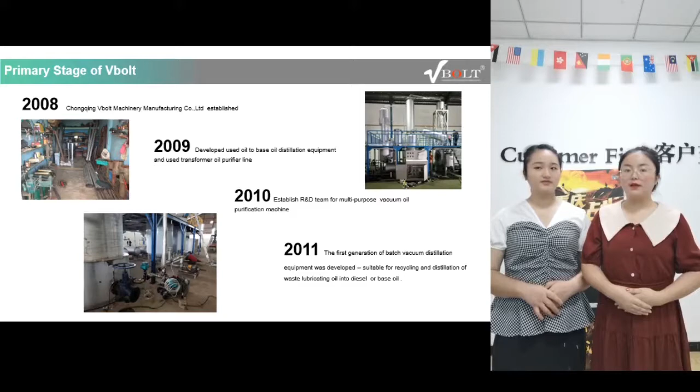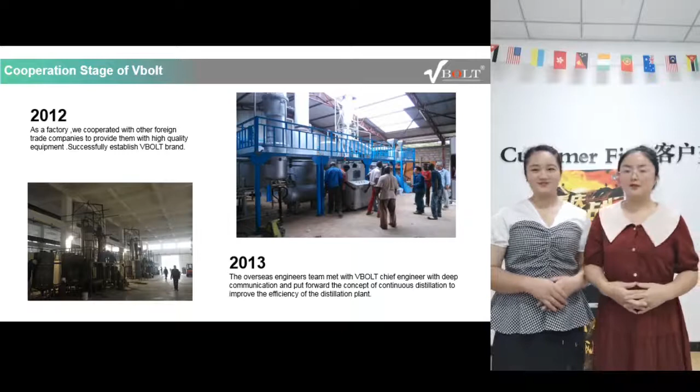After installing the machine, we tested the machine and we have turned the batch machine to continuous. It makes our machine more efficient. Oh yes, and changing the batch machine to a continuous machine means more productivity. Yes. And also we have gotten many innovations in those years.

Lisa, do you know the advantage of the membrane distillation technology? Yes, compared with the traditional distillation technology, I think there are 4 advantages of the thin film evaporating technology. First of all, this technology can make the waste oil form a dynamic molecular oil film, and this oil film can be evaporated rapidly in a short time, and it also can remove the water and the light hydrocarbons out of the waste oil. So in general, this technology can bring us more profits because it has more productivity and efficiency.

So compared with the traditional technology, our membrane distillation technology is more efficient. Yes, and more efficiency is more profits. Great. And how about the sulfur content? This is a main factor for the oil quality. How do you reduce the sulfur content?

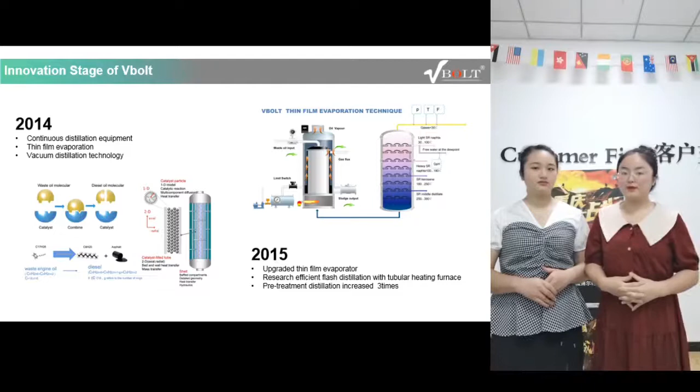Yes, we know that the sulfur content of the used engine oil is normally between 4,000 to 5,000 ppm, and after being treated by our machine, we can help our customers get diesel with 50 ppm sulfur content.

But we know that in the pyrolysis oil, the sulfur content is higher than in the used engine oil. How do we reduce the sulfur content? Yes, and we have also developed the extraction technology, and this extraction technology can reduce the sulfur content.

But for our company, just as I mentioned, the thin film evaporation technology can also reduce the sulfur content of the tire pyrolysis oil. So it's our company's trump card. We know that the sulfur content of the tire pyrolysis oil is about 10,000 ppm, and after being processed by our machine, we can get diesel of about 100 to 200 ppm. So for this reason, we don't need to use the extraction system.

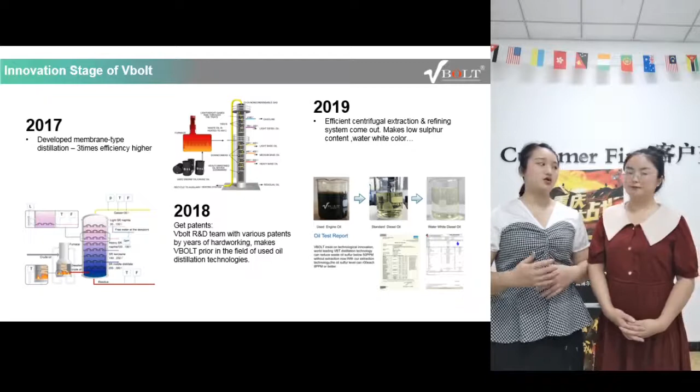Oh, so great. And let's see a short video about our factory.

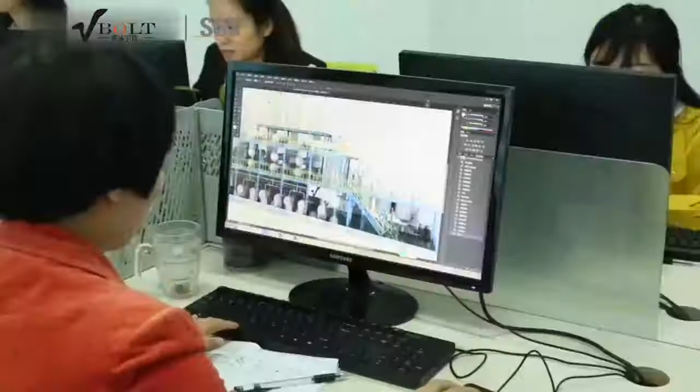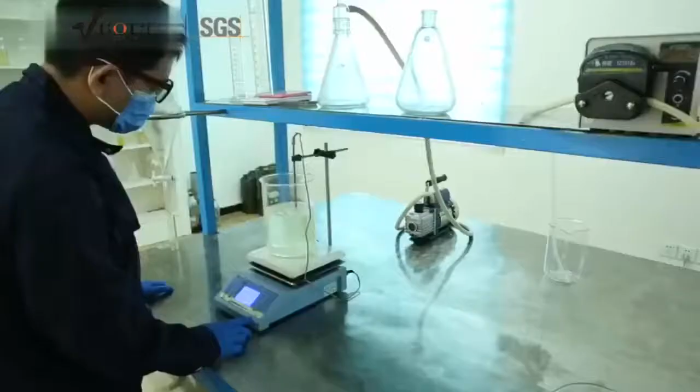Chongqing Vbolt Machinery Manufacturing Company Limited is a professional manufacturer engaged in the research, development, production, sale and service of waste oil recycle equipment, oil filtering equipment, extraction equipment, and distillation equipment. In recent years, Vbolt has obtained CE certificates, R&D multiple techniques, and successfully applied for patents. These include thin film evaporation systems, completely continuous high-efficiency membrane distillation systems, vacuum distillation systems, diesel oxidative desulfurization systems, chemical recycling systems, lubricant regeneration systems, etc.

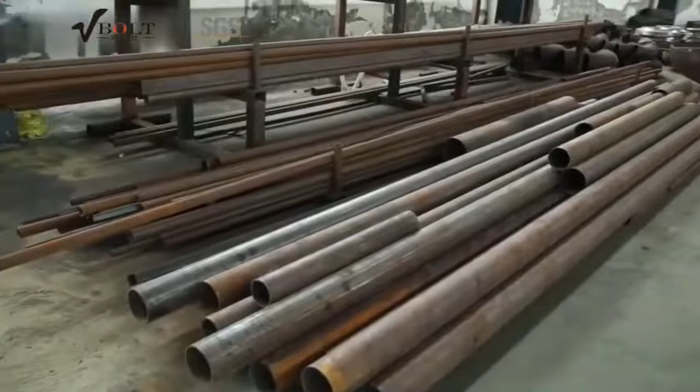Vbolt high-efficiency distillation equipment could not only recycle waste diesel engine oil, gasoline engine oil, various engine oils, industrial oils, hydraulic oil, transformer oil, etc., but also catalyze cracking of pyrolysis oils such as plastic pyrolysis, tire pyrolysis, and rubber pyrolysis, etc. At present, the completely continuous high-efficiency membrane distillation is the most advanced technology in 2019.

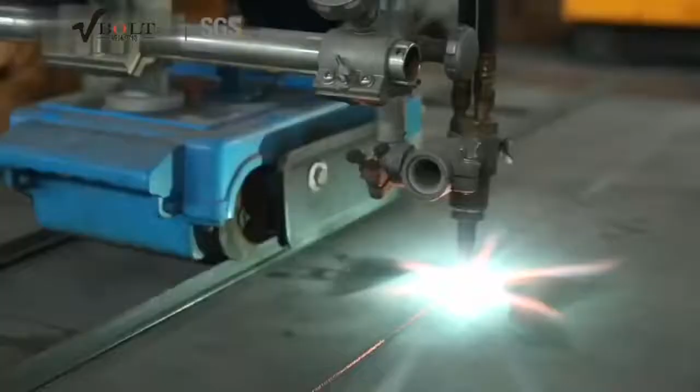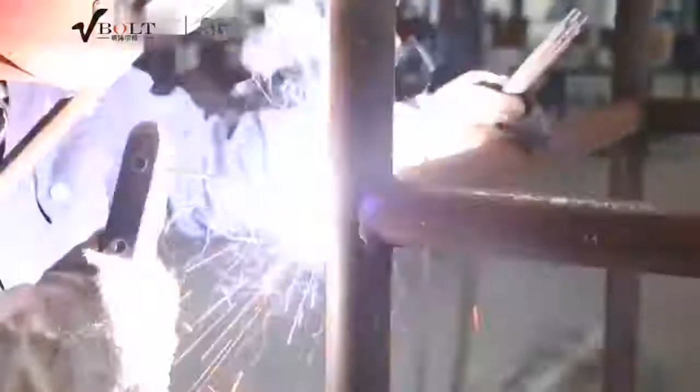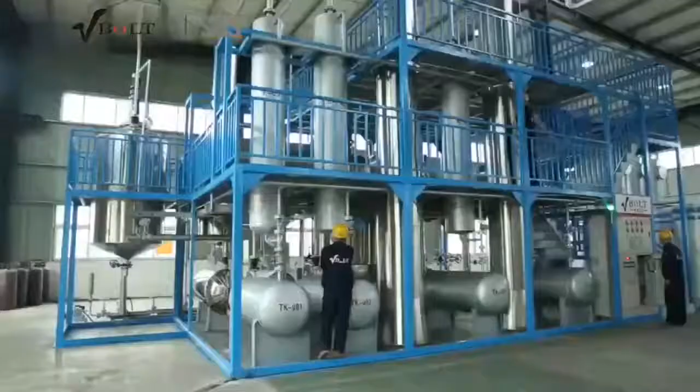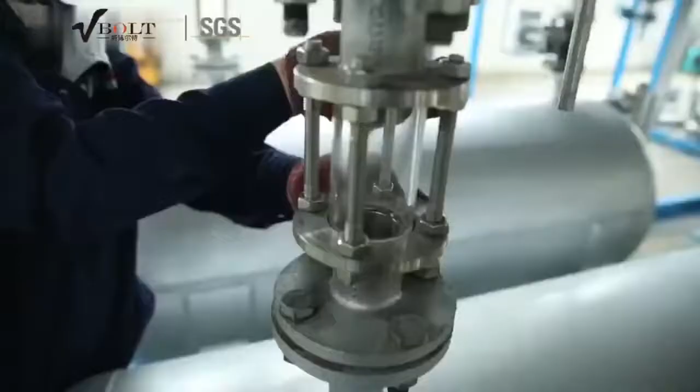Dedicated to strict quality control and thoughtful customer service, our experienced staff members are always available to discuss your requirements and ensure full customer satisfaction. Selling well in many cities and provinces around China, our products are also exported to clients in such countries and regions as Southeast Asia, Africa, and Middle East. We also welcome OEM and ODM orders. Whether selecting a current product from our catalog or seeking engineering assistance for your application, you can talk to our customer service center about your sourcing requirements. Welcome you from all over the world to our factory.

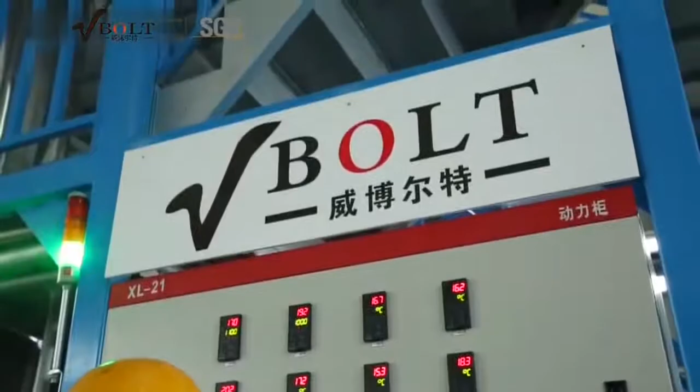Also, in those years, we have done research and development. In the field of oil treatment, we have gotten many certifications. What's the meaning of the Chinese Scientists Forum, Lisa? Oh yes, this award is issued by the Chinese Scientists Forum, and this award praises our company's progress and innovation in the oil distillation technology. So I think this is a great honor for our company, and also for the oil refinery industry.

Also, we have gotten many exclusive patents, like we talked about before, the membrane distillation technology. Yes, and the sulfur reduction technology, etc. Yes, we want to protect the environment, but we know if we process or use oil, it will generate some waste gas. How do you achieve this part?

Yes, we know that all of us are responsible for environmental protection, so this is also an important part for our company. So our company will do 2 steps to clear the waste gas. First of all, we will remove the acid in the left side tower, and then we will use the UV photo-oxygen catalytic equipment to remove some bad smell and bacteria of the waste gas. So you mean after treatment by our machine, is there emission? Yes, and it can meet the emission standard.

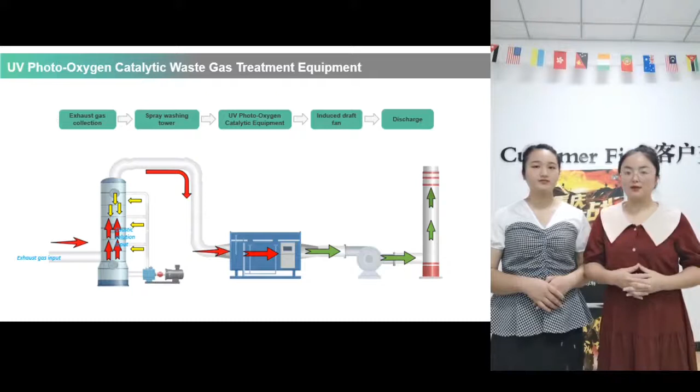Okay, great. And the next part, let me introduce the main products of our factory. The first one is our used oil to diesel distillation plant, the second is the used oil to base oil distillation plant, and the final is our oil purifier. And the first one is our used oil to diesel distillation plant.

Our diesel distillation plant can treat different kinds of used oil. Yes, like used engine oil, used motor oil, heavy fuel oil, and so on. Before treatment, the used oil color is very dark, and after being treated by our machine, we can get a yellow or water red color diesel.

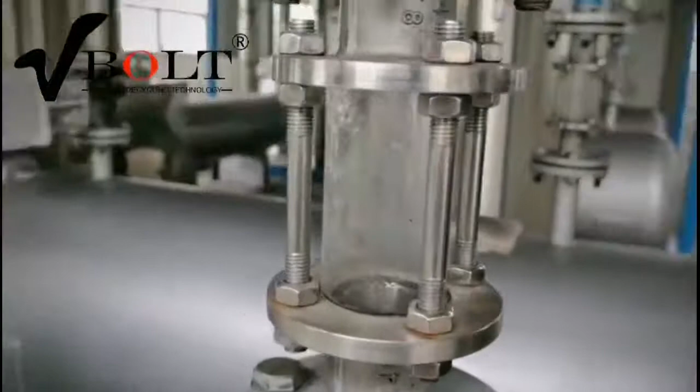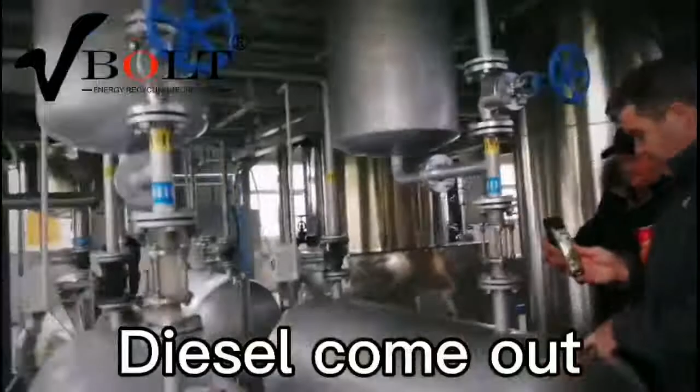And ours are base oil distillation plants. They can also treat different kinds of used oil. After being treated by our machine, we can get base oil. Yes, but some of our customers want to make the base oil into lubricant oil, so can we provide them the lubricant oil blending machine?

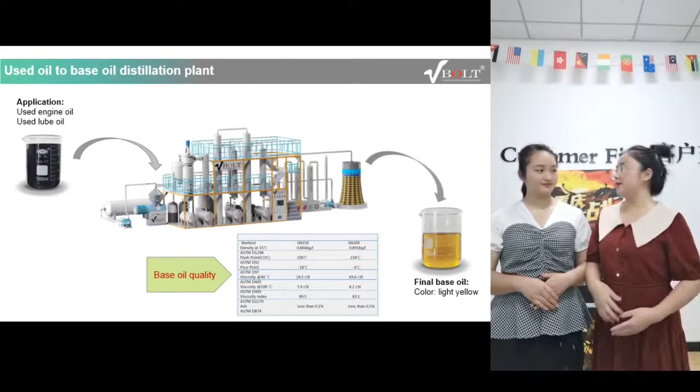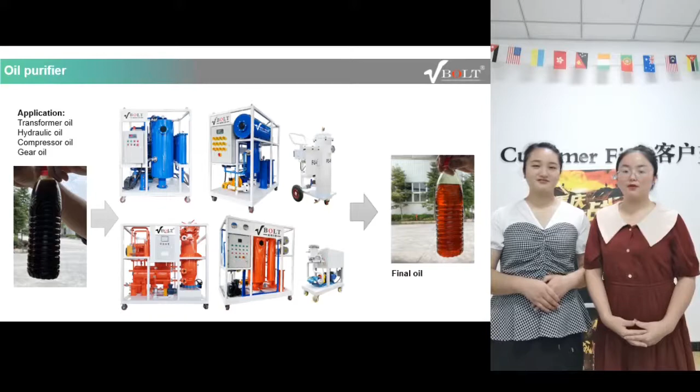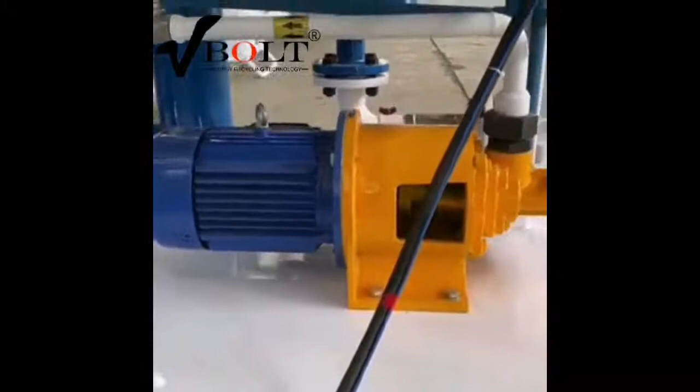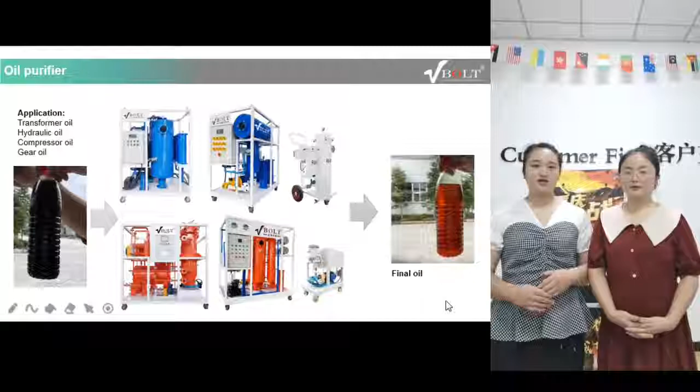Yes, our factory also provides a color removing system. It can change the red color to yellow or water-like color. Okay, this is a short video about our oil purifier. From the video, we can see that the final oil is very clear and pure.

Yes, Lisa, many customers want to do this project, but they don't know what they should do. Yes, so this is our company's duty, to help our customers invest small money but get more profits from this oil recycling. Money is very important for all of us. About the investment and the profit, can you analyze this part for our customers?

How many laborers do we need each shift? Yes, for the 1 ton per day machine, we just need 1 staff to run the machine. And how about the heating? Because in some countries electricity is very high cost. Yes, and if the price is high in your country, we can also provide various heating methods, such as coal heating, wood heating, or burner heating. So we can choose the heating way according to our customers' local market.

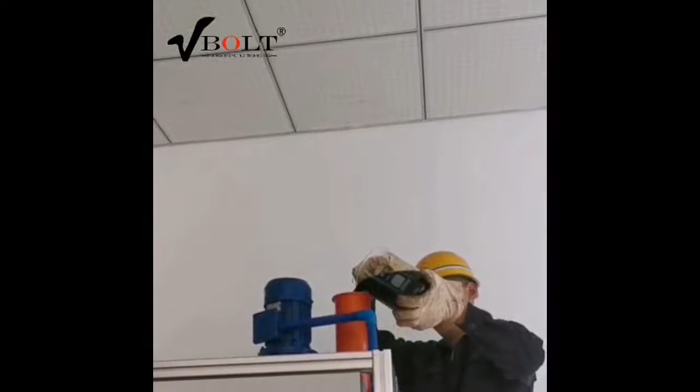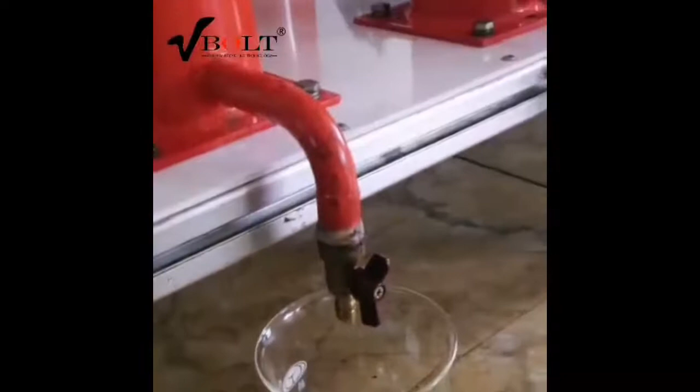So before you order, our customers can visit our factory with the used oil sample. We can do the experiment. Yes. Or you can send the used oil sample to us. We do the oil experiment. And then you can know our oil quality and the technology more.

Yes, and after you place the order, our engineer will also make the drawings for you, and we can give you more suggestions to help you invest less, and you get more profits from the oil recycling machine. Because in this part, many customers have limited space for the dimension of the machine.

Can you design according to the customer's layout? Yes, of course, we are a customized product. So if your space is limited, you can give us your data, and we can give you solutions, and we'll help you make the layout and how to put this machine. And we can also adjust the dimension of the machine according to your factory and your requirements.

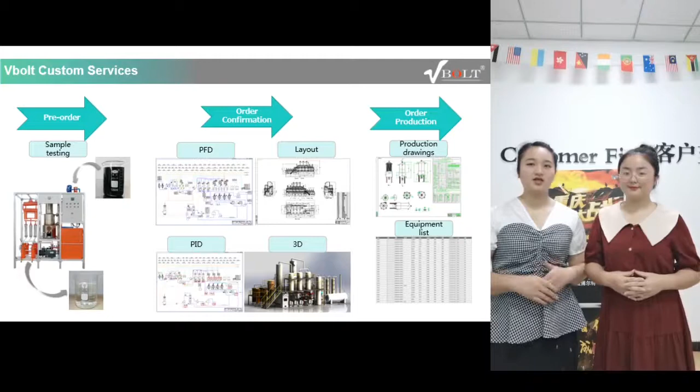Yes, and many customers want to be more confident to do this project. So are there many successful cases that you can show us? Of course, our company has also done so many projects all over the world, distributed to South America, Africa, and Southeast Asia. And now I will show you more videos about our projects we've done in recent years.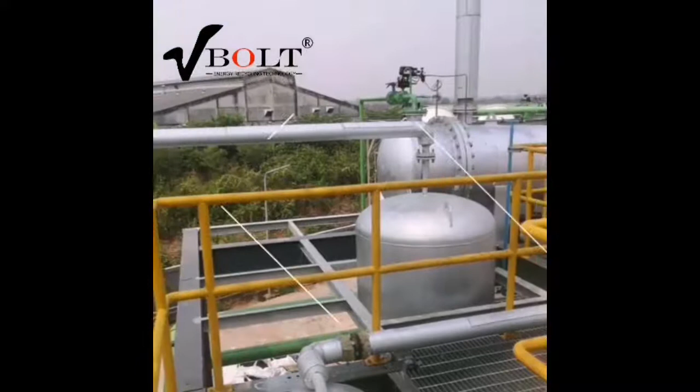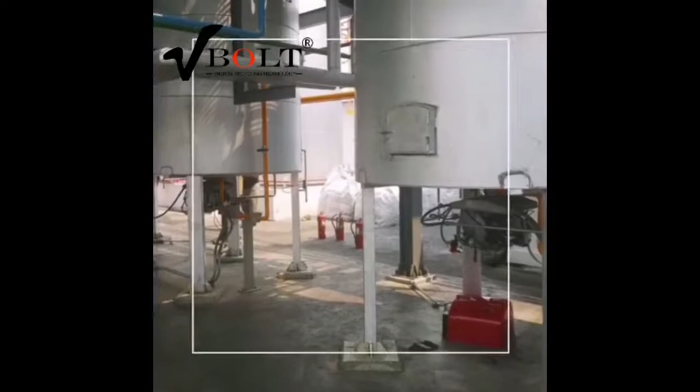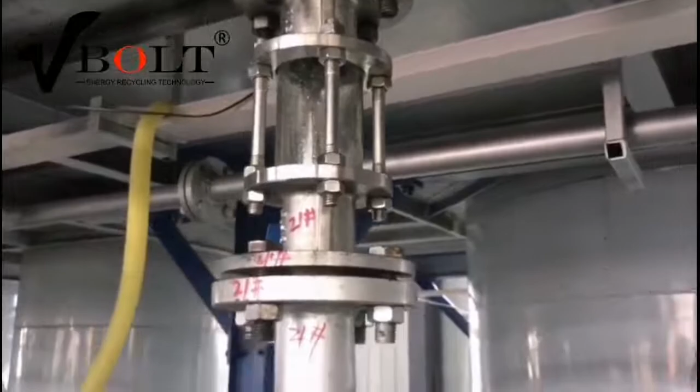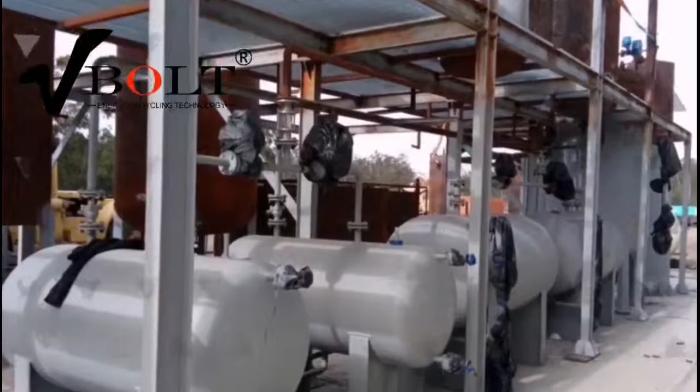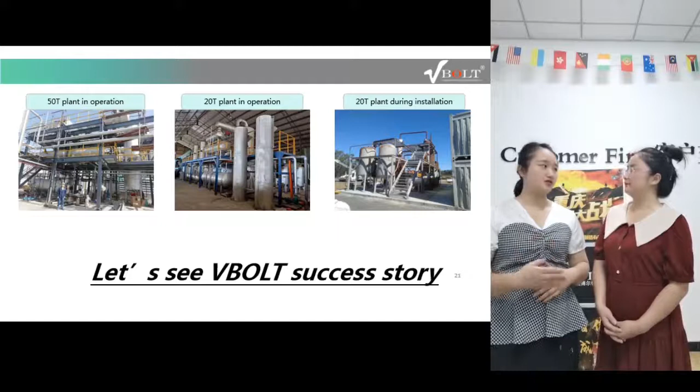Provided by our engineer in Australia, and from the video we can see that we have completed the preliminary works, and the unfinished part includes painting, wrapping the insulation materials and connecting the circuits, and all the unfinished parts will be finished after 1 month.

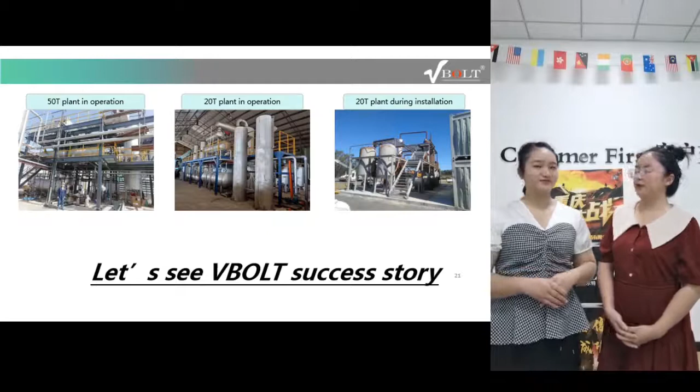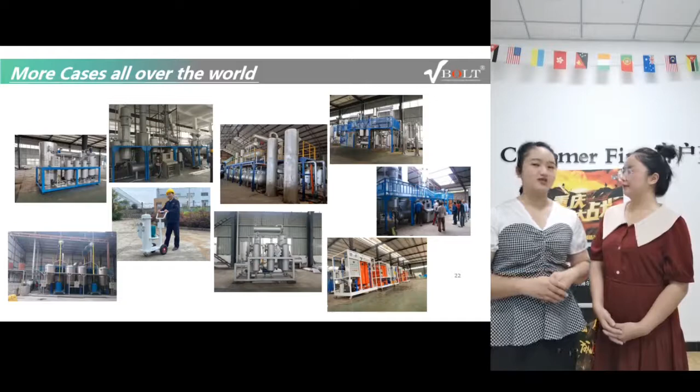Oh, that's very great. And thanks that the customers still trust our technology. Yes, and we know that all the success cannot be achieved without our customers' support and our team's cooperation. So thanks for your kindness to us. Yes.